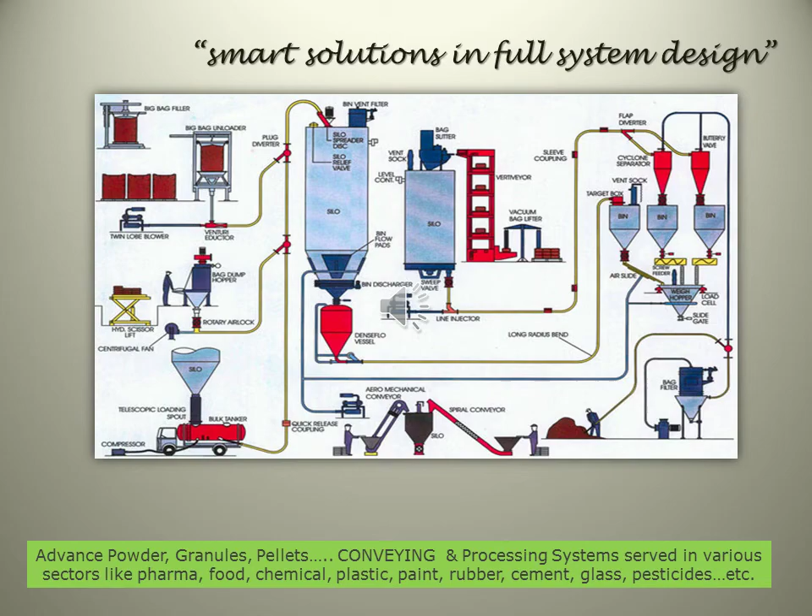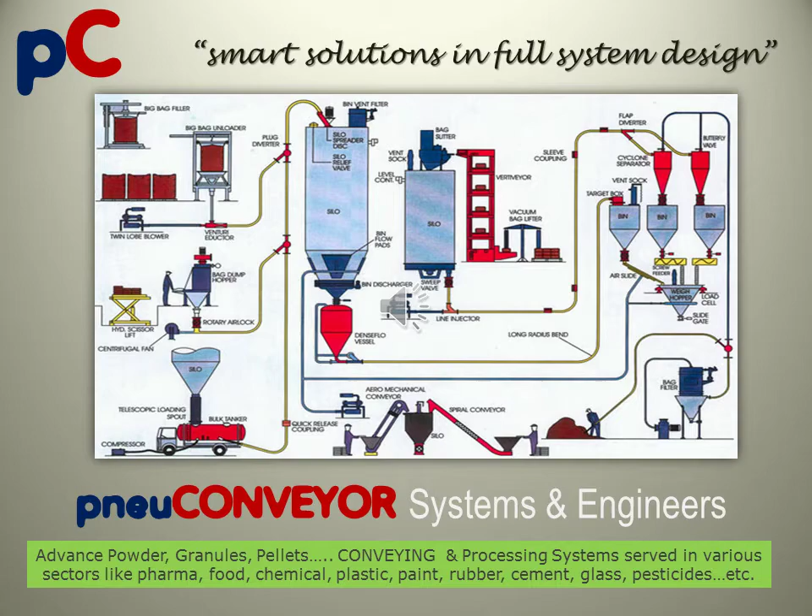pneuCONVEYOR has extensive experience in execution of complete powder, granules, fly ash, bulk solids handling systems in medium to large sectors on turnkey basis. This includes design and engineering, manufacture and supply, site fabrication and erection, and associated structural works. These services cover all activities involved in a project right from concept to commissioning.

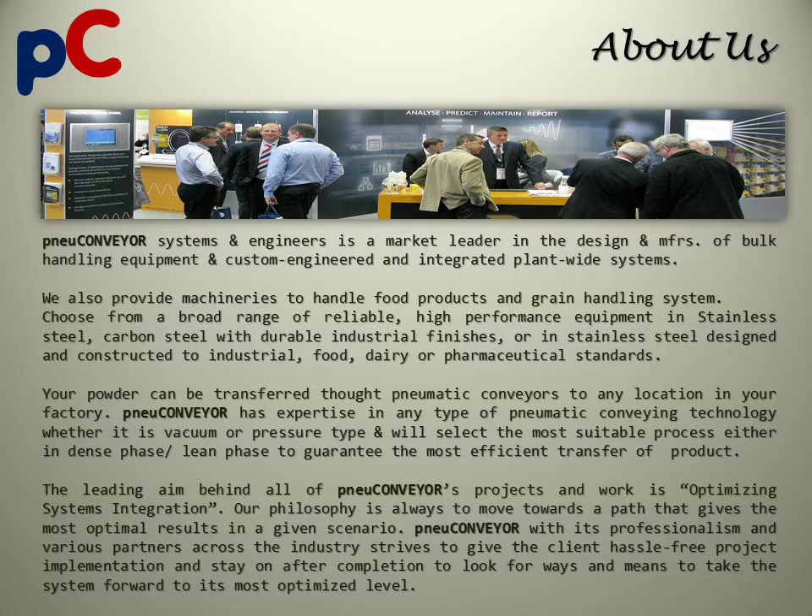pneuCONVEYOR Systems is a solutions-oriented equipment supplier, specializing in custom design and implementation of bulk material handling systems in India. pneuCONVEYOR is a top-notch manufacturer, supplier and export company dealing in products like pressure or vacuum pneumatic powder conveyors, mechanical conveyors like tubular chain drag conveyor, screw conveyor, dense or dilute flow systems for fly ash or cement conveying systems, bulk product handling systems, milling, sieving, mixing, drying machines and equipment, bunkers, storage tanks and pressure vessels.

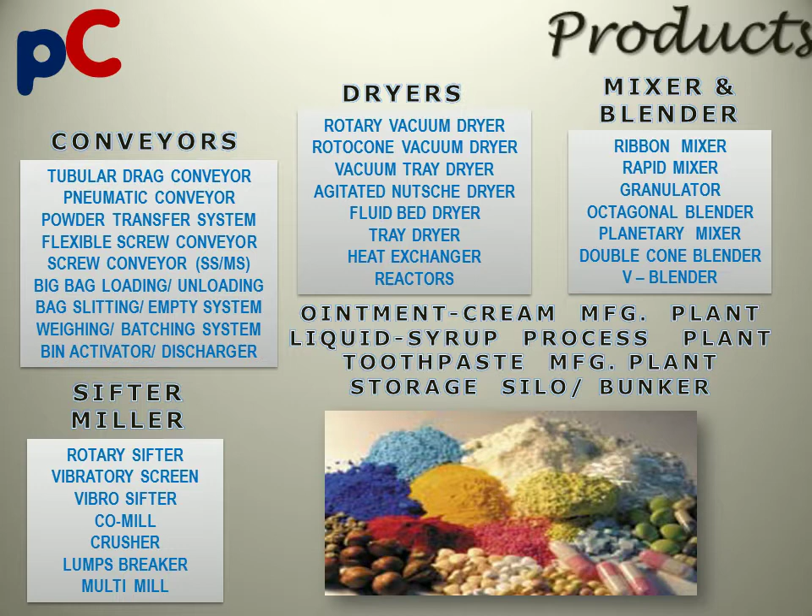Tubular drag chain conveyor provides gentle, enclosed continuous transfer of bulk solid materials, including fine powders, granules, pellets and moist sludges, at any angle, in any plane, and around any obstacle. The chain links in the conveyor's chain and disc conveying mechanism function like universal joints, enabling the conveyor to simultaneously move material in multiple directions and planes. The conveyor also has a low profile, flexible design that allows it to fit into tight spaces around existing plant equipment.

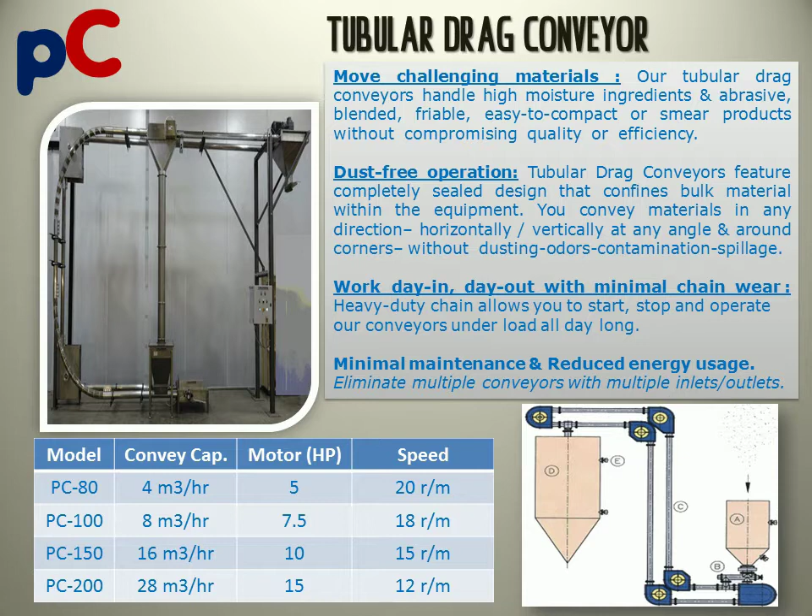Dense phase conveying is a highly reliable pneumatic conveying system with low velocity and a high product-air ratio, suitable to convey powders and granules. With dense phase conveyors, the product is introduced into the conveying line through a pressure vessel and is suitable to convey products from a single point to one or more receiving points. Material runs in a closed pipe with no dust, protecting the environment, with reliable operation, fewer wearing parts, easy maintenance, and a long lifespan of 3 to 5 years.

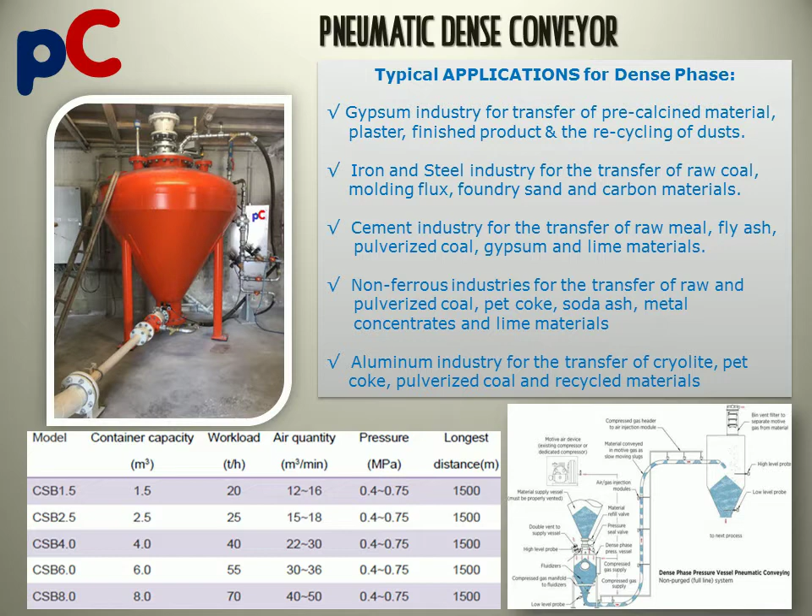Powder transfer system is a unique dry material transfer system for dust-free operation that avoids human touch. This system is used in pharmaceutical, food, bulk drug, agrochemical, sugar industries and other organic and inorganic chemicals. The system is designed specifically for direct charge loading of blenders, mixers, sifters, milling machines, reactors or any vessel capable of withstanding a vacuum. It can be provided as a mobile type with lifting provision to move from one room to another for loading and unloading any machine.

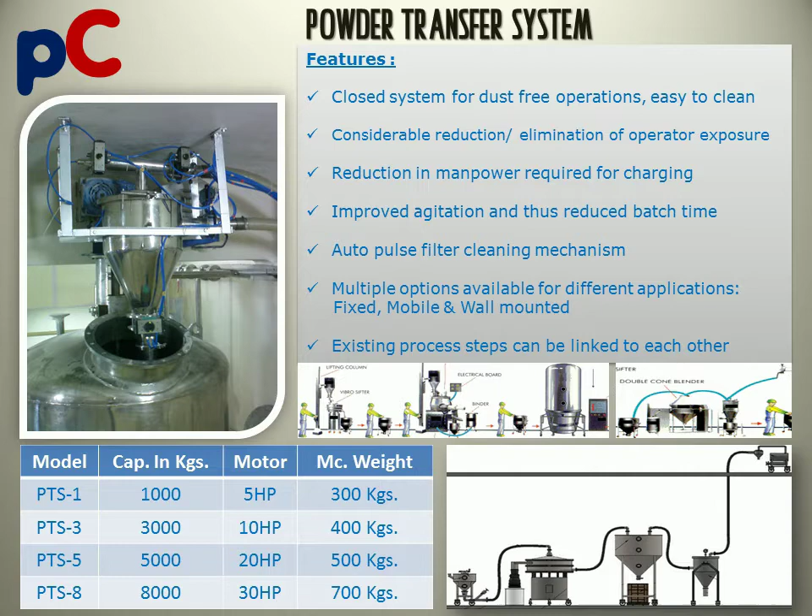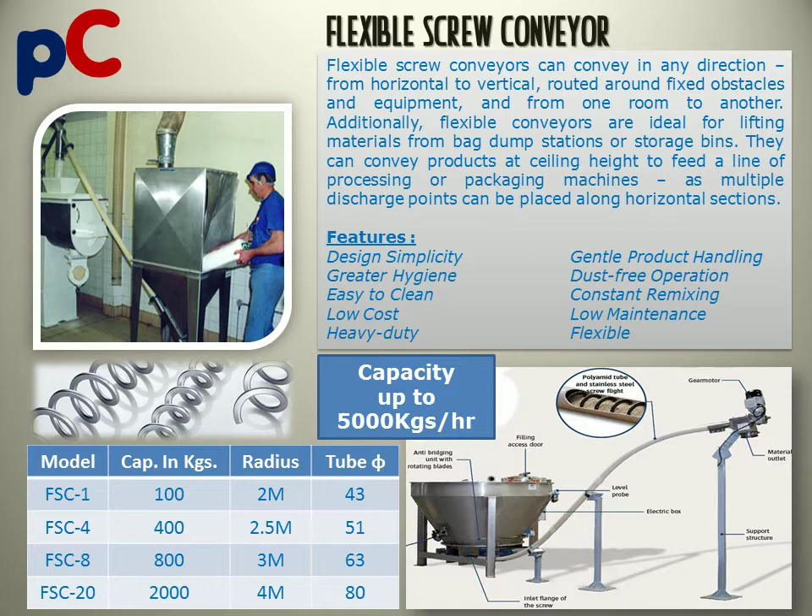Flexible screw conveyor is designed to handle bulk dry powders and granular materials, also able to deliver bulk product at a desired rate and elevation. A typical application for the pneuCONVEYOR flexible screw conveyor is to have the main drive motor hanging from the ceiling, locating the discharge point at a specific location and elevation. The flexible screw conveyor can be set up to operate intermittently, running only when it receives a signal from the low-level sensor controller in the receiving hopper. Once a signal is received, it pulls the bulk product from the lower hopper at a designed rate of speed.

Screw conveyors are capable of handling a great variety of bulk materials, from sluggish to free-flowing. They can have multiple inlet and discharge points, so bulk materials can be conveyed and distributed to various locations as required. Once the power switch is opened, the screw begins to rotate and feed, lifting the material up to the outlet. The machine stops automatically when the level sensing device indicates that the material is full, and starts again several minutes later when the material level decreases.

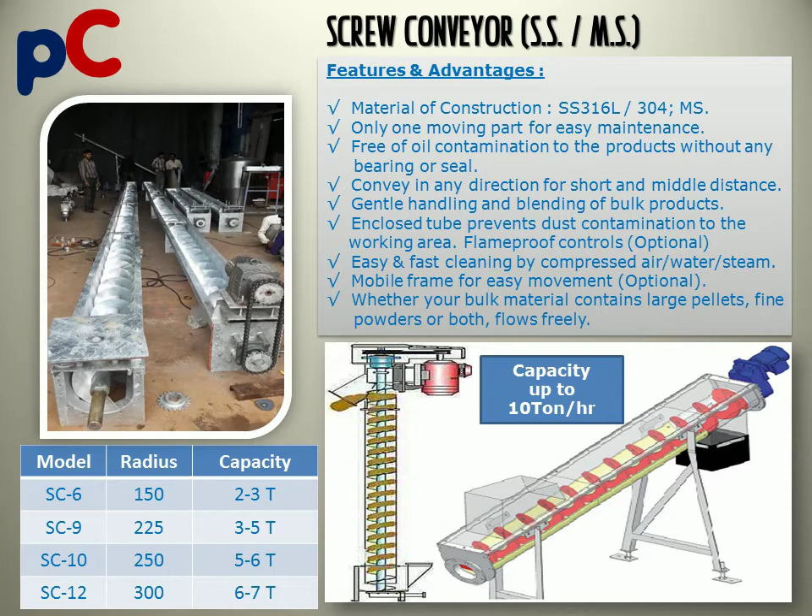Big bag stations are designed for loading and unloading bulk bags in an effective and safe way. Different types of bulk materials can be handled, from free-flowing granules to poor-flowing sticky fine powders. The modular design of the system makes it easy to configure for each application need, such as big bag loading and unloading, product storage, dust collection, dosing and conveying, all within a single unit. It is also easy to clean, with a maintenance-free design, rigid steel construction, and a filter system for preventing dust.

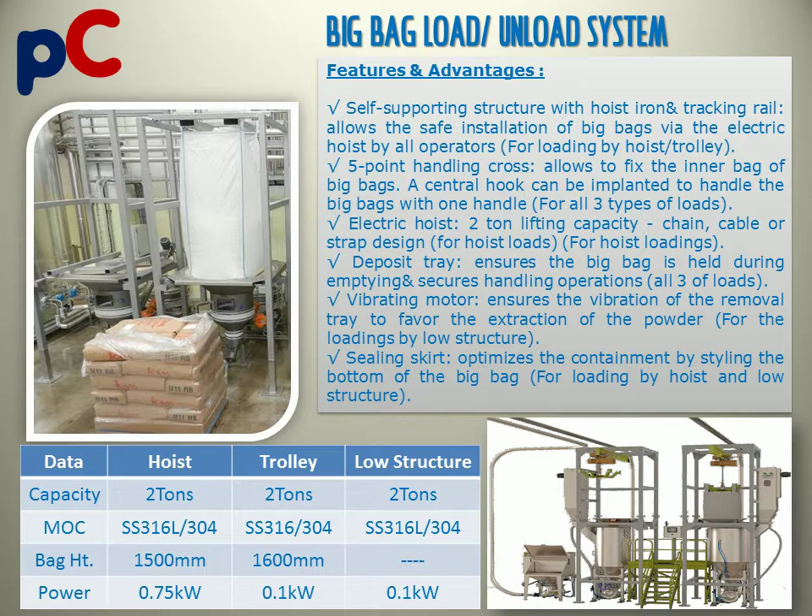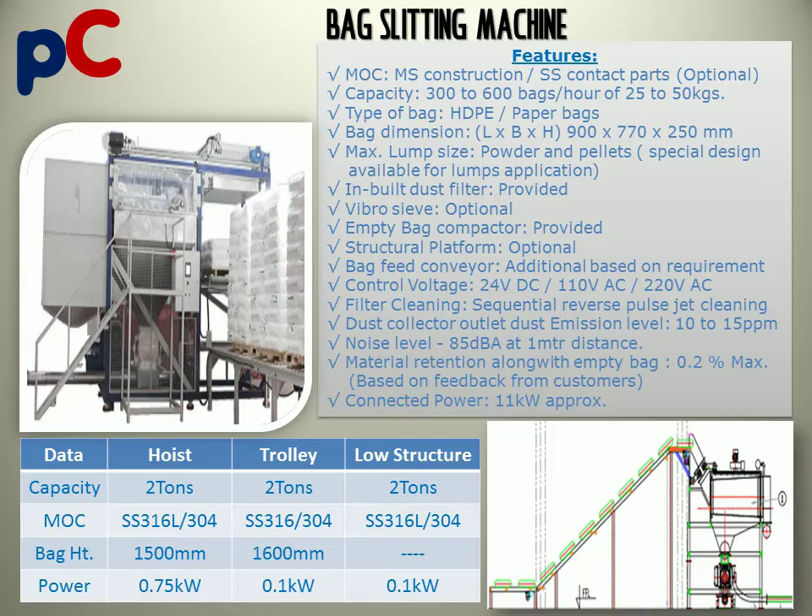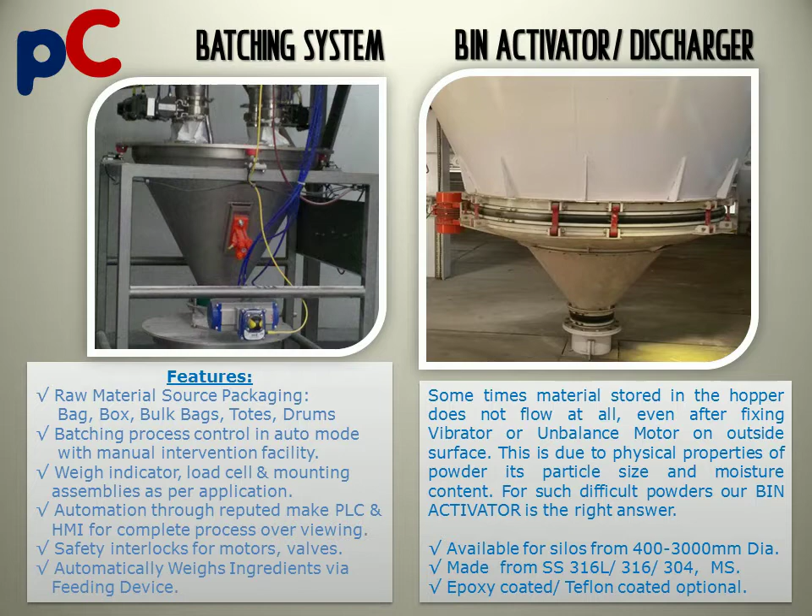Today's process industries most often rely on bin activators and dischargers to move dry bulk materials out of storage on demand. Properly applied, bin activators and dischargers eliminate bridging and rat-holing, reduce particle segregation and promote mass flow. They are efficient, convenient and economical, and attach to any bin or silo, whether new or existing.

Rotary vacuum paddle dryers are utilized in varied industries to extract and obtain dry powder either from solutions or wet cake. Operational efficiency is high and the costs incurred are low with this dryer compared to other dryers in the market. The mechanism involves a closed system wherein hot water, steam, or hot fluid is used as a heating medium within the jacket, in the hollow paddle, as well as in the hollow shaft. This paddle dryer includes a vacuum pump, condenser, receiver and dust collection.

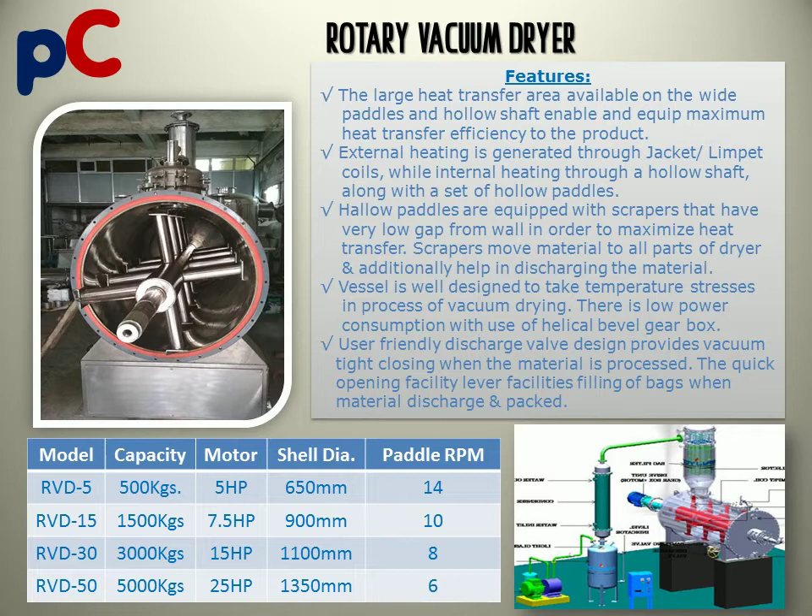Rotocone dryer works under vacuum, facilitating enhanced drying efficiency, low temperature operation and economy of process through total solvent recovery. It is most suitable for drying materials which cannot resist high temperature, materials which are easily oxidized, volatile materials which should be retrieved, and materials that are strong irritants or poisonous in nature.

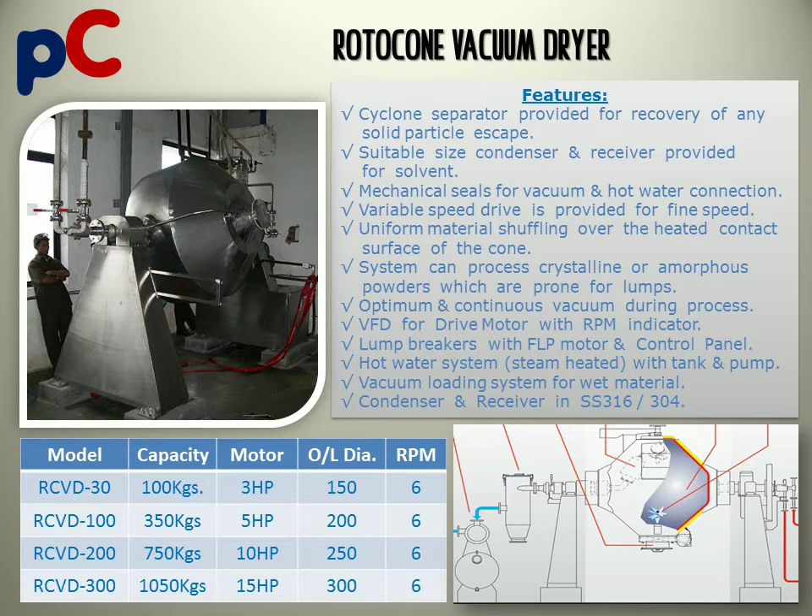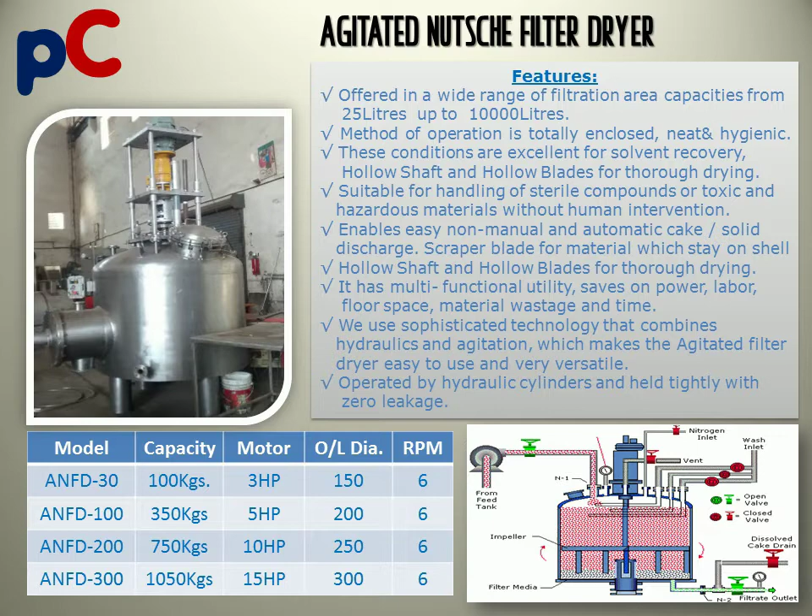Due to vacuum, the drying is enhanced resulting in fast drying, cutting the process time, which saves heat energy and electric energy. Agitated Nutsche filter dryer is a closed vessel designed to separate solid and liquid by filtration under pressure or vacuum. The advanced technology of agitation and hydraulics used in the equipment makes it versatile and user-friendly. This is a combination of filter and dryer unit in single equipment to achieve economy in process, space and energy, thereby improving profitability.

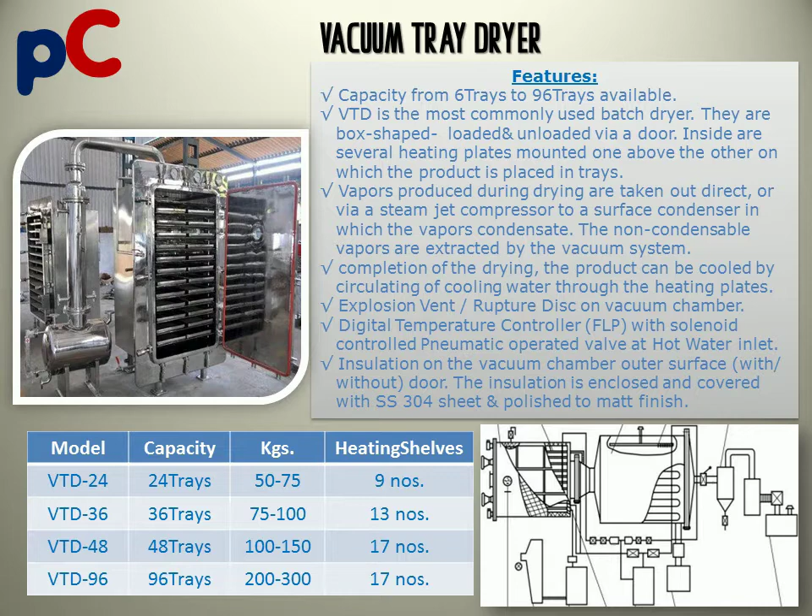Vacuum tray dryer is used mainly for drying of high-grade, temperature and oxygen-sensitive products. It is highly suitable for drying hygroscopic substances, which are dried to very low residual moisture content level. Frequently, vacuum drying cabinets are the sole possibility for drying lumpy, glutinous products or products of low porosity.

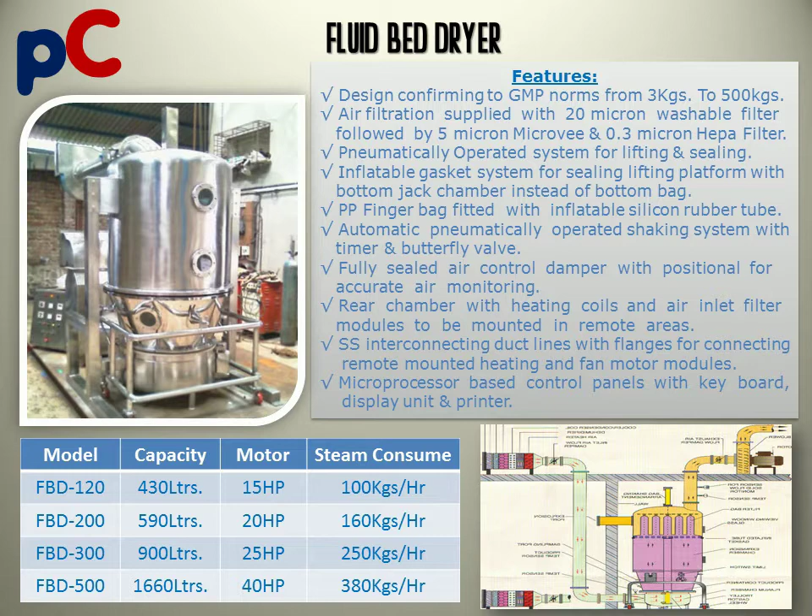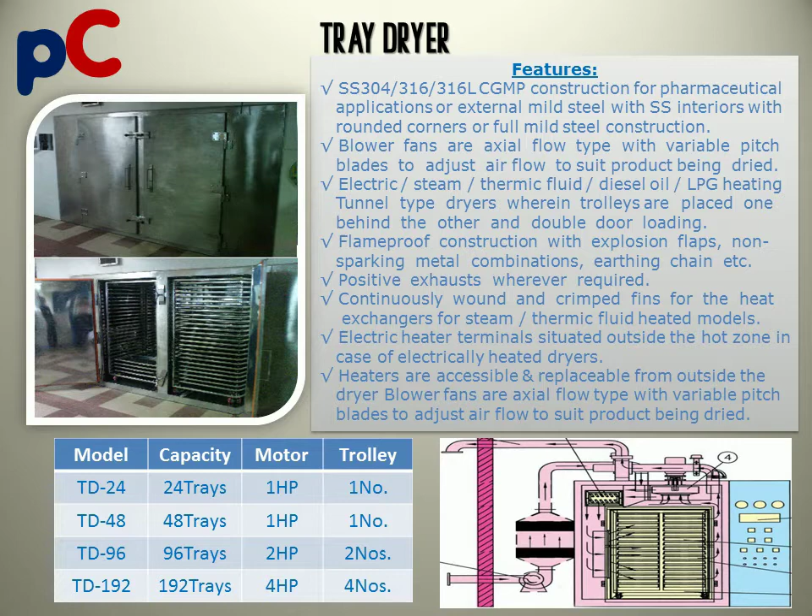Tray dryer's basic working principle is the continuous circulation of hot air. In the tray dryer, moisture is removed from the solids placed in the tray by forced convectional heating. The moist air removal is conducted partially but in a simultaneous fashion. Available in 6, 12, 24, 48, 96 and 192 trays per batch capacity.

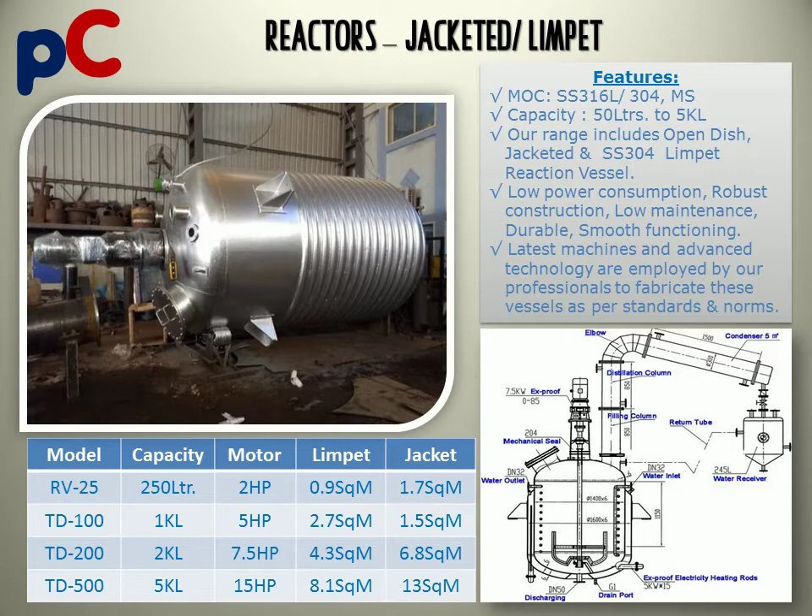Reaction vessel is made according to customers' specific requirements in different sizes, shapes, with or without jackets, various types of agitators, with limpet coils. They are designed and fabricated to match the optimum process conditions of temperature and pressure with efficient mixing application. Reaction vessels are widely used in liquid formulation, solid-liquid mixing in chemical, food, pharma and paints industries.

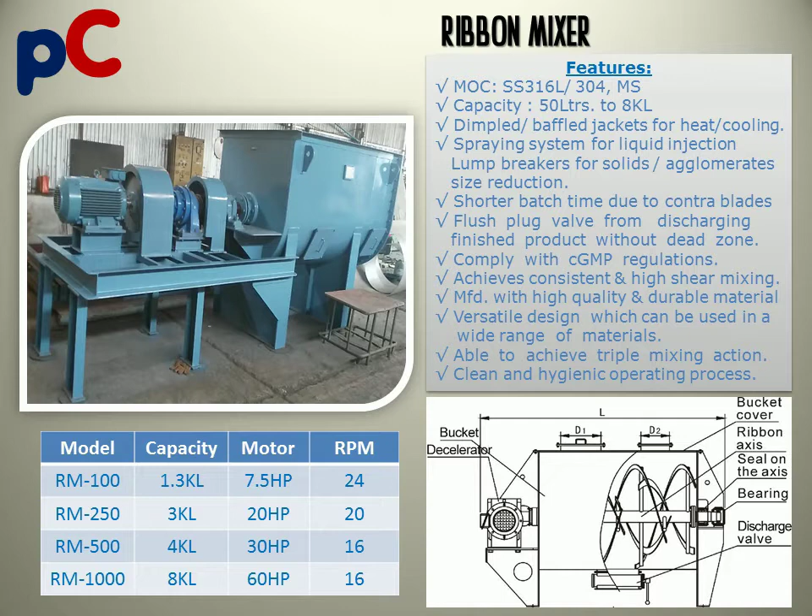Ribbon blenders operate on two principles of mixing: convection and diffusion. Convective mixing is the macro movement of large portions of the solids, occurring when the solids are turned over along the horizontal axis of the agitator assembly. Manufactured in stainless steel 316, 304 and carbon steel construction, with heating jacket as per demand, available capacity 50 liters to 8 kl.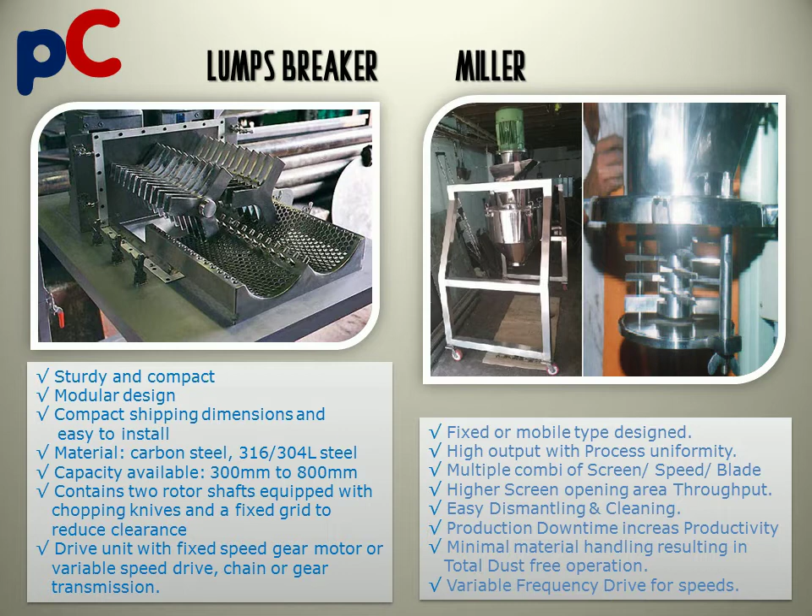The multi-mill operates on the principle of variable force swing beaters having both knife and impact edges rotating within a selected screen to get the required size reduction. In the multi-mill, particle size reduction is done through impact in air, on material by blades moving at high speeds, inside a cylindrical hopper.